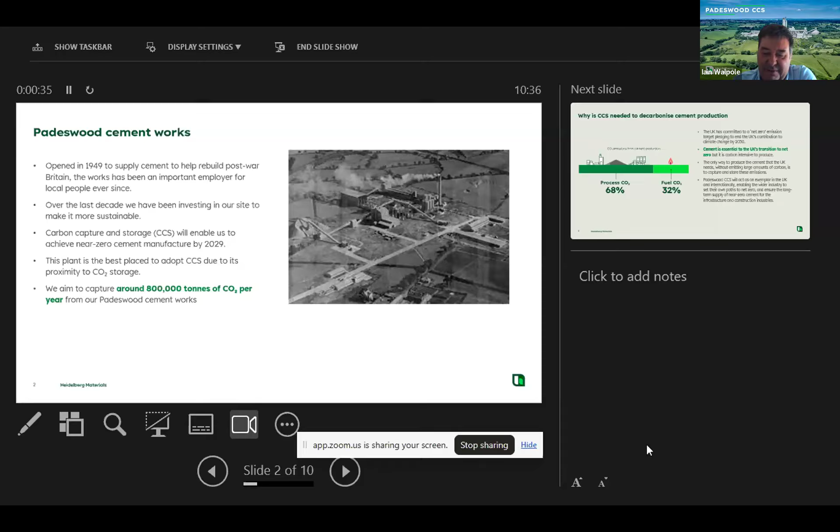Just to say, Ian, sorry, just had a note through. So you are currently in presenter view. I don't know if you can take that off. Oh, I wasn't intending to be in presenter view. We'll try stop sharing. You're getting to see all my slides. I think I've stopped sharing, haven't I now? You have stopped sharing, yeah. Yeah. It's a pain in the neck, isn't it? Right.

If it's easier, I have your slides, so you could just say next slide. I'll try again. What have you got now? I've got your screen sharing of me, so not your slides. You've got my slides, full screen? No, so we don't have your slides. You've just got a picture of me currently. Yeah. So if you go back to your PowerPoint slides.

Try something different here. No, those are now your emails, I'm afraid. Has that worked? Okay, you're still in presenter view, but let's just carry on for the sake of speed. That's fine, thank you. How about this? There we go. Perfect. Get there in the end. Right, great, sorry, I've used about 5 minutes of everyone's day up now.

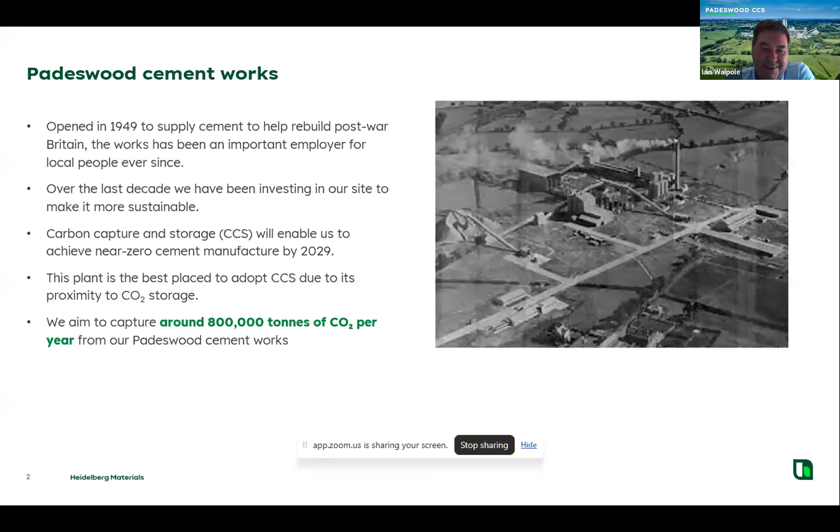Okay, so I've introduced Padeswood, from 1949 there. I think one of the key things for us in the cement industry is that we need carbon capture and storage to fully decarbonise our process, because around 68% of our emissions come from the limestone we use as a raw material. So even if we fully decarbonised all our fuel and converted it to hydrogen, we'd still have around 70% of the emissions from the process. So basically, CCS is essential for cement decarbonisation.

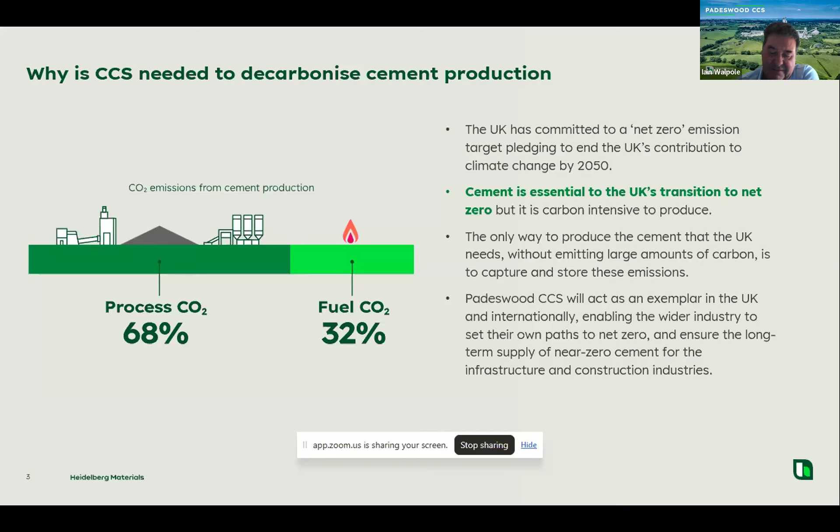And a few things where we've had to do some innovation around carbon capture for ourselves. We're including a CHP plant, combined heat and power, because we don't have a sufficiently large grid connection in the area, and when that will be upgraded to provide the necessary power, we'll be waiting another 15 years from today at least. Also, there's insufficient heat available on site to operate the process.

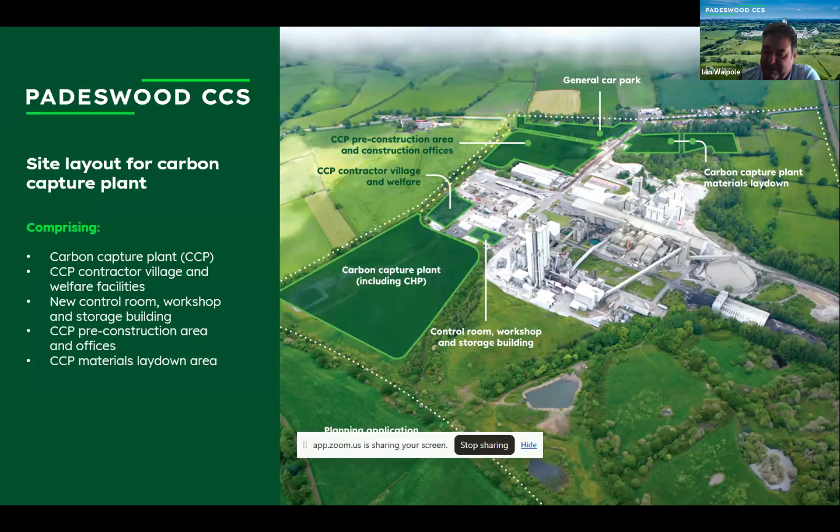So it's a huge installation compared with the existing cement plant. We've got a bit of waste heat recovery around the system as well, and water treatment before discharge to the river from any surface runoff.

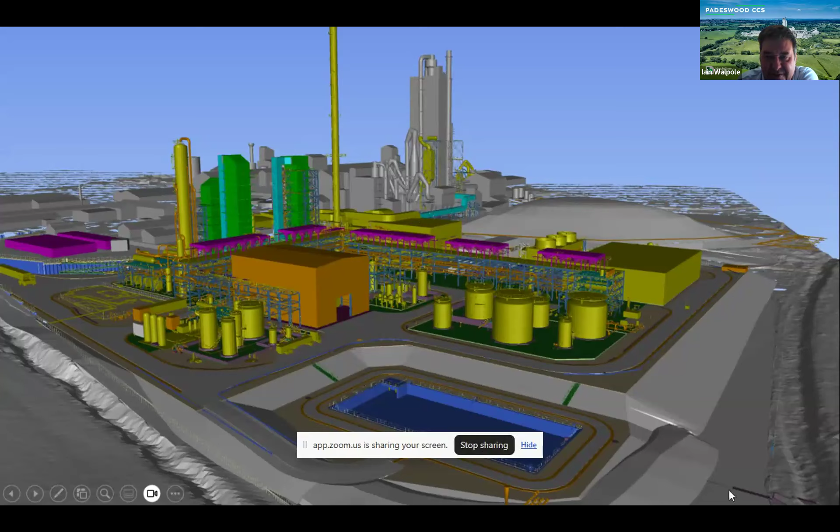So a little bit of history through the project timeline. We started out doing the industrial decarbonisation challenge as part of HyNet in 2021. At that point, HyNet was selected for the track one cluster. So we went through the UK cluster sequencing process, and it was shortlisted in August 2022.

At the same time as all this was going on, we were gradually progressing some of the engineering work. So at each milestone where we got some government approval, we felt comfortable to invest further in starting feed and so on. So everything moved in parallel - alongside the engineering feed, we also started the planning process and the permitting process. Everything was moving along with almost three strands: engineering, government funding, and consenting.

So basically, we got to about mid 2025, where all the pieces started coming together. We got our planning permission in April 2025. We took FID with government in September, and at the same time, the EPR permit was issued. That basically gave us the point where we could start moving forward with detailed engineering, where we are now, and procurement and on-site construction work.

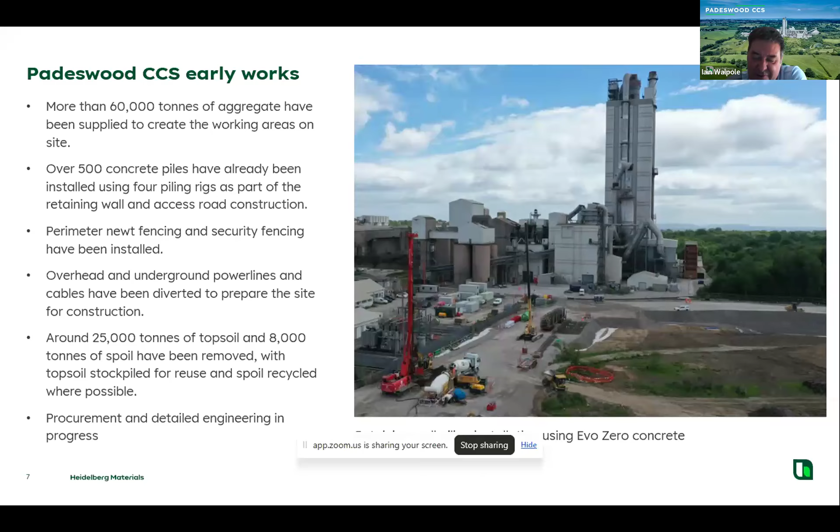At present, we're installing piling for the retaining wall at the north of the site and down the road. We've had 60,000 tons of aggregates delivered. We've had about 5.5 kilometres of newt fencing around the site because we had great crested newts in the pond you saw in the first photograph. Again, everything's working to schedule for commercial operation in 2029.

One of the differences between Padeswood and Brevik is we will be using a lean gas phase pipeline for storage. At Brevik, it goes through a liquefaction process and ship loading and into the Northern Lights storage system. So as a business, we've got experience now of operating a carbon capture plant, which we're then building into our development at Padeswood.

And then a final point really around net zero materials. Part of our Brevik process is we're producing what we call Evo Zero, which is the carbon captured cement. So customers are able to buy a fully decarbonised cement. Now, it's not too far from Brevik, which is on the coast, to import the physical product into the UK. But if we were, say, a construction project in southern Europe, in Spain, then shipping and trucking would increase the carbon footprint of the product significantly.

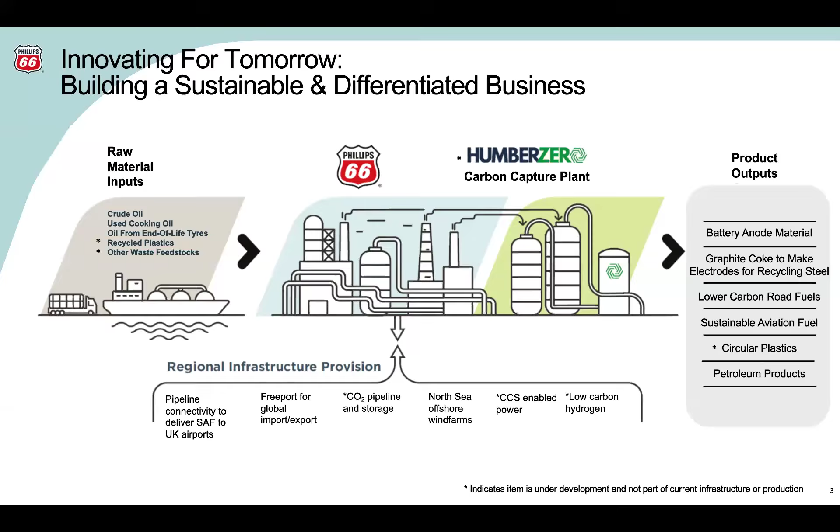The Humber region where we are located is the largest industrial cluster in the UK, and we closely engage with many of the operators in that region to look at how we can deliver decarbonisation, how we can connect and make some of these projects really come to life.

I touched on renewable fuels already in the waste feedstocks or waste-derived feedstocks. We have been leading in this since 2016, we started processing used cooking oil at the Humber refinery and have since grown that production to include processing of tyre pyrolysis oil. And again, this is providing a really important reuse for what otherwise would be materials that go for disposal. And in doing so, you reduce the life cycle GHG emissions of our fuels by around 80%.

We were the first UK producer or processor of used cooking oil for renewable fuels. We are the only producer of development fuels, which are those more advanced feedstocks. And we're the only at-scale UK producer of sustainable aviation fuel. We have a multi-year contract that has been in place for a couple of years with British Airways to supply sustainable aviation fuel at Heathrow Airport.

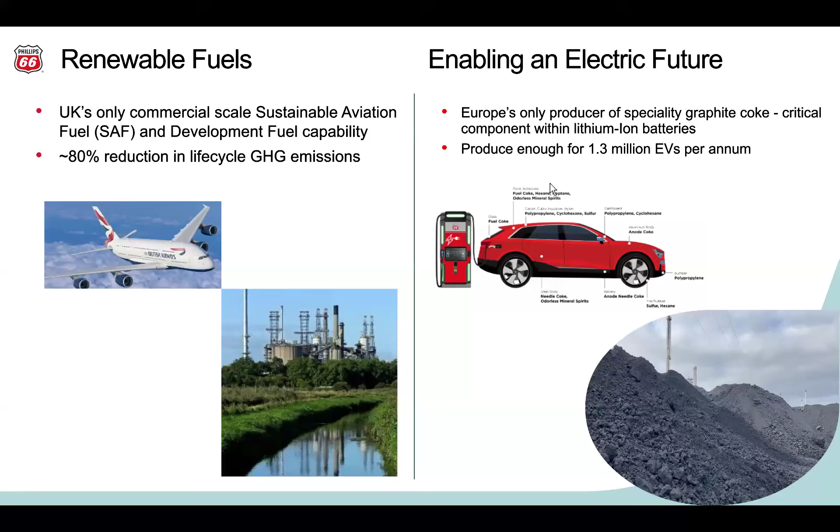Okay. So then on to a little bit more about the decarbonisation of the production facility itself. We have been working on a carbon capture project and have completed the front-end engineering design, and that was with funding from UKRI in the Industrial Decarbonisation Challenge, which kicked off in 2021, and that FEED was completed in 2023. A phenomenal amount of engineering activity really went into completing that FEED. And hopefully you can see the video graphic, which shows a sort of virtual carbon capture plant there at the refinery.

We went through the process of selecting a technology supplier and chose Shell's carbon capture technology for that. And we collaborate very closely with Harbour Energy on their Viking CCS proposition, which is selected as a Track 2 cluster in DESNZ's carbon capture programme. The initial phase of the carbon capture has been chosen for the Humber refinery's fluid catalytic cracker unit, which would be up to 500,000 tonnes per annum of CO2 capture.

We also... Are you there, Jenny? So we've slightly lost you. Or at least I've lost Jenny. I'm assuming everyone else has.

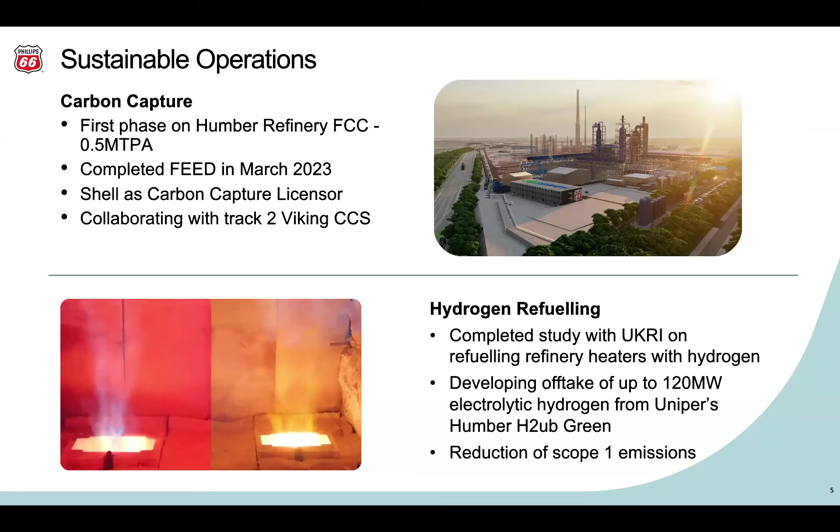And this is partly a community engagement and a learning and then building trust and collaboration activity, but it's also to try and tell the story of the refinery and ensure that people want to come and work here, want to keep coming and working here. That's important for the refinery as a base business, but it's absolutely essential for delivering some of these decarbonisation projects, which will require more people and skills to make them happen. I think that's a wrap up of my slides.

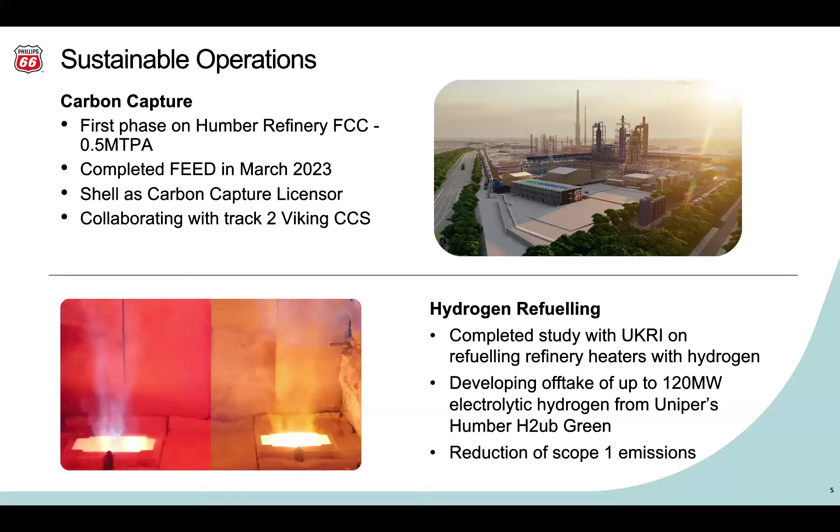Wonderful. Thank you very much, Jenny. And really wonderful to hear about the range of activities that is going on at Phillips 66. I'm always amazed by the graphite coke example there, and thinking about this is something being produced in the UK and is absolutely critical to future technology and what we're building here, and demonstrating the benefit as well as all the other products that Phillips 66 are producing as well.

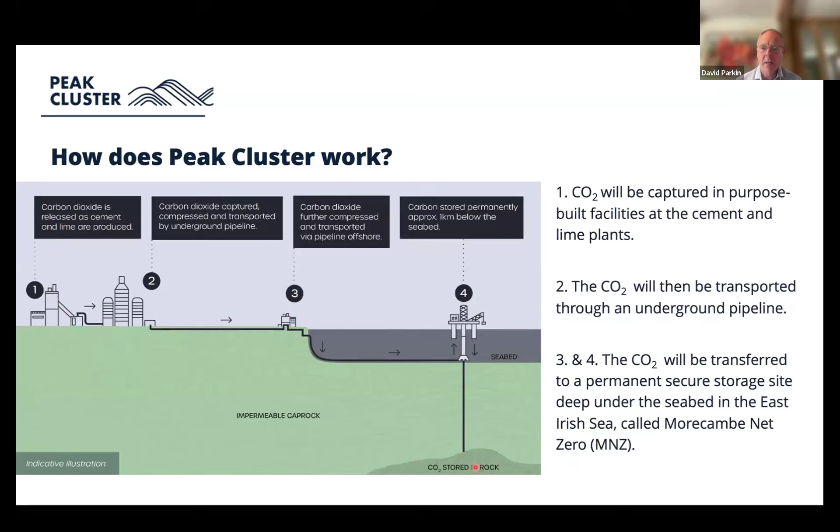So we've talked a lot about the capture plants through Ian and Jenny, so I thought I'd talk a little bit about pipelines today, which is kind of my bread and butter. So, look, major infrastructure projects do impact a lot of communities. This is a significant piece of infrastructure. And quite rightly, local communities have got lots of questions about what we're doing. Is it going to damage the environment? Is it going to cause construction impact? How do we ensure that it's done safely? How do we ensure that we reinstate from an environmental perspective? All of which are very valid questions.

So through our community engagement, we're trying to explain how this works. But one of the points I often make is there are already nearly 30,000 kilometres of high pressure steel gas pipeline in the UK used for conveying natural gas. They've been built over the last few decades with an exemplary safety record. They operate safely and reliably beneath our feet over the entire country. We don't notice them, we don't see them, and they're just there.

So our project will very much look like that after we finish building it, but we do need to build it along the way. So where we're going to route the pipeline, we look to take a strip of about 40 metres in width, and we clear the topsoil away from that to give us a working width where we can move machinery up and down. We then excavate a trench.

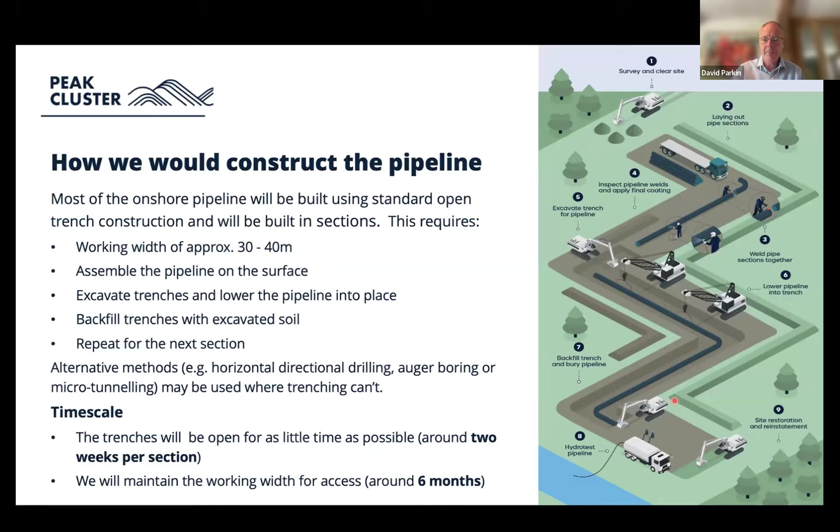We do need to tunnel underneath some roads. We do need to close some minor roads. But as part of our planning process, we have to agree all of that with the local highways authorities. That is all monitored very carefully. So we do look to keep construction disruption to a minimum.

So the vast majority of our infrastructure is below ground, and for that we do not require permanent land purchase. We take out a long-term easement, and then we can return the land largely back to its previous use. So farmers can continue to farm. So if you drive around the country today, you can sometimes see gas pipeline marker posts, which essentially show where there are pipelines underground, but all of those fields are farmed.

There are some restrictions. You can't build over the pipelines. There are some trees you can't plant, but most normal fencing and hedging and normal agricultural activity you can do. But we do need a few other facilities along the way. So we have the carbon capture facilities, which is what Ian's talked about, the big major infrastructure for capturing the carbon in the first place.

And then periodically, over our 200 kilometres, we've got about 4 what we call above ground installations. These are maintenance areas where the pipelines come out of the ground. Sometimes we change the pipeline diameter. Sometimes pipeline spur connections join up to each other. But generally 100 metres by 100 metres, chain link fencing, but fairly discreet. And then we have much smaller block valve stations about every 10 to 15 kilometres along the pipeline.

We do have one facility along the pipeline route, which is an above ground installation with a compressor. That is a larger facility. It's about 7 or 8 football fields with a chimney. So that does have some visual amenity impact. And clearly we need to work with local communities to ensure we manage that appropriately.

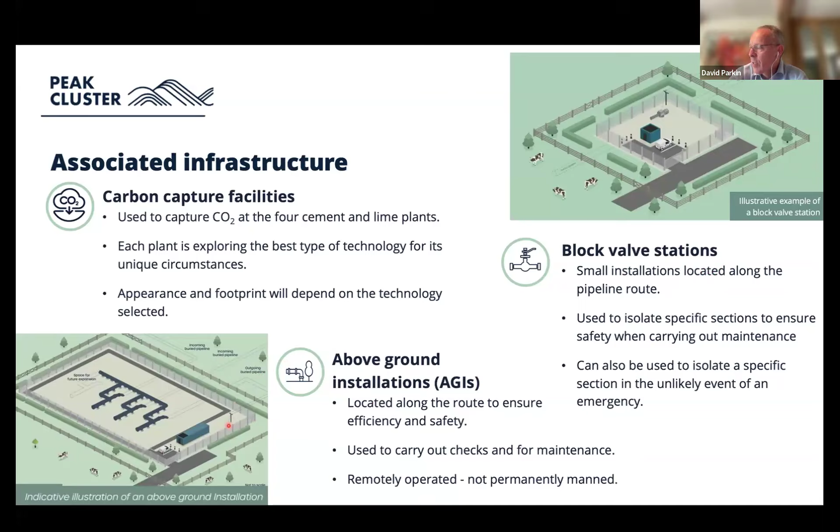So I think just the last piece I wanted to pick up on, and I alluded to this briefly earlier, is that, look, this is fundamentally an environmental project. We will probably abate about 1,000 times the level of emissions that we will use in building the pipeline. So people often say, what's your payback period? So the carbon payback period of this project is months, may even be weeks, because there will be embedded carbon in the steel and the concrete we use and the machinery we use.

But fundamentally, we're doing this project for environmental reasons, but we do need to protect the environment as we go. So we are subject to a very comprehensive environmental impact assessment, which will be reviewed as part of our development consent order. We work very closely and we get advice from a whole range of regulatory bodies like Natural England and the Peak District National Park Authority. We need to manage our construction operations very carefully.

And we are going to be a biodiversity net gain project. So we do a baseline assessment of the entire route. We map all of the biodiversity. We use essentially a government calculator, with which we determine an overall biodiversity score for our project. And we commit to leaving that environment 10% better than we found it.

So if we take out 100 metres of hedge, we have to put in 110 metres of hedge. If we take out 10 ponds, we put in 11 ponds. And we have to commit to maintaining that enhanced biodiversity for at least 30 years.